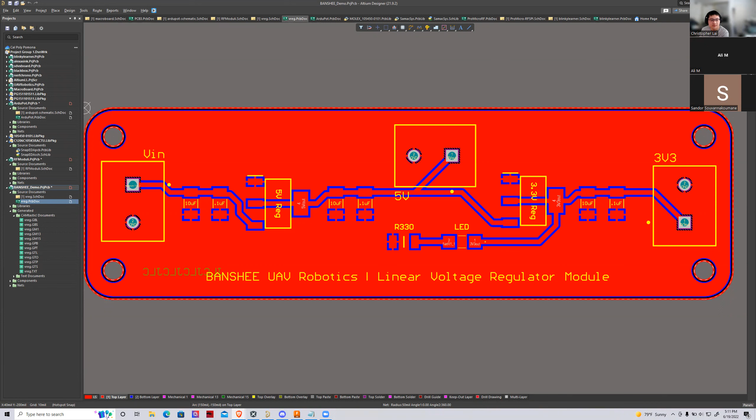Okay, let me just pull up my music back again. I need to have music play in the background, or else my headphones turn off. It's kind of some power safety feature. So if no one's talking for a really long time, it just blanks out. Okay, give me a second. Okay, that should be fine.

All right, so in the previous PCB workshop, we designed this little PCB here with mounting holes. And the purpose of these mounting holes, like I said, was to put screws inside. So my personal favorite screw is the M2.5 by 6 millimeter screw, or the M2.5 screw by default. 2.5 stands for 2.5 millimeters in diameter. So this 100 mil hole will approximately fit the 2.5 screw perfectly.

And so since this hole is in the center of it, we can screw it into something and the PCB will just hang from there. So in order to mount something to a 3D object, this is pretty important. So starting from this point, I'm going to go ahead and first teach you how to extract the STL file from this PCB. Now, remember from the PCB, if we press the 3 button, we can actually see the 3D model of what this looks like.

We have terminal blocks here. We have some SMD chips. We have some capacitors. We have some AMS1117s. It's all pretty cool. But did you know that we can actually turn this into an STL? So all we need to do is go to export, and we need to export it as a STEP 3D file. Now I'm going to go ahead and put this inside my Banshee demo project in Altium. And I'm going to go ahead and just export all.

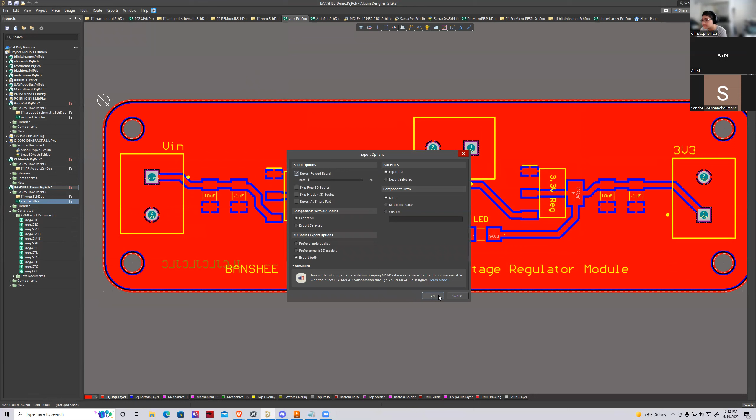Okay, so this is done. Now, I'm going to get back to that in a second, but before that, let me show you exactly what I'm talking about when I say PCB mount. So this is the PCB mount for my Blinky Learner soldering kits, which I have made for the soldering workshop. We can see here that this bottom piece is basically what we're going to look for.

This bottom piece allows us to put a battery inside and screw it shut using a cover, and also has a neat little design in the back with the Hyperloop logo on it, and the top perfectly fits our PCB here. And I'll teach you how to do some projection tricks in order to do that. So this is what we're looking for.

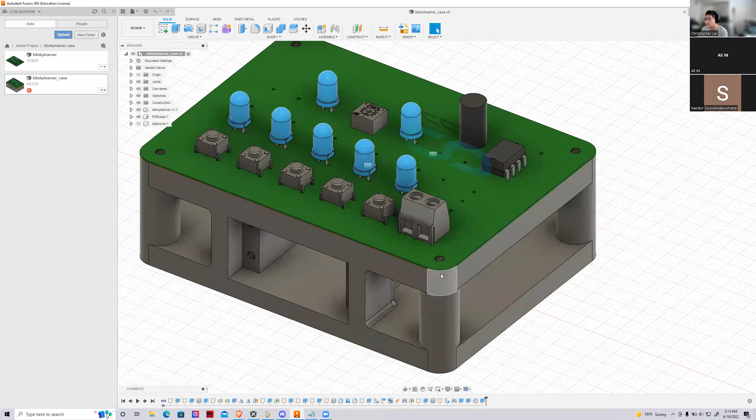This PCB mounts directly into the center of the top mold, and it allows us to screw it in. The 3D printer even prints these screws out. So it allows a really nice tight fit. Okay, so in that case, I'm going to go ahead and create a new file. And I'm going to put this file inside the UAV Banshee Robotics, and I'm going to put it inside case demo.

Okay, new design. So in Fusion 360, you want to first go to the File button, and you want to click New Design, right? And this will give you a new 3D plane in which you can start building it. But before we do that, I have to import something. I have to upload my step file that I imported from Altium.

Now, a step file is basically a 3D modeling file, and it contains instructions for the 3D software on how to reconstruct that diagram. So if I go to documents here, I go to projects, I go to Banshee demo, I go to vreg step. I'm going to drag this inside Fusion, and it's going to start uploading this into the software. So the step file gives it instructions on how to rebuild this file inside of the 3D window. So just give it a little bit of time.

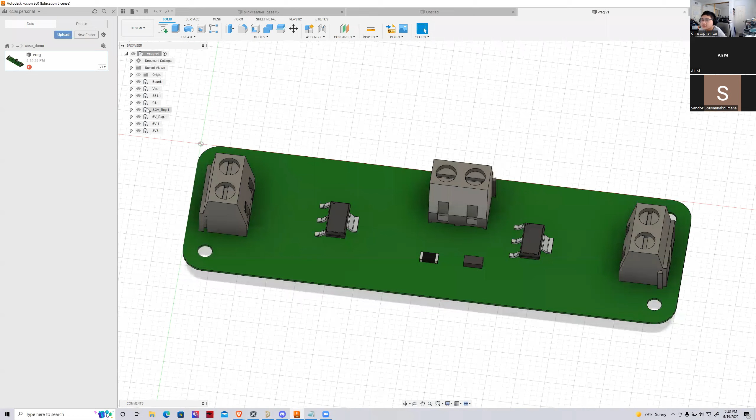Okay, so if we take a look at the VREG model, we can see that this is what our PCB looks like. This is what it looks like without any of the traces. It doesn't actually put the traces on, unfortunately. But in general, it's pretty good. It gives us a bare outline of the size of our PCB. And so this will allow us to design something for it without actually knowing what the size of the PCB is, which is great because that's what projection is.

So we have our PCB, which we're going to design around, right? I'm going to put this into my main body. So this is the case. Okay, so to begin any CAD model, the first step is always your initial sketch. The initial sketch is a 2D shape that goes on either the X, Y, or Z axis. Eventually, in order to make this 3D, you do something called an extrusion. You extrude from this 2D shape into a 3D shape. But everything starts from a 2D sketch, like a square or a triangle or a more complex shape.

All right. So I'm going to quickly import this VREG PCB into my current design right here. I'm going to move it up about 1 inch or so. And I'm going to change the document settings so I can CAD in millimeters, because that's usually better for me.

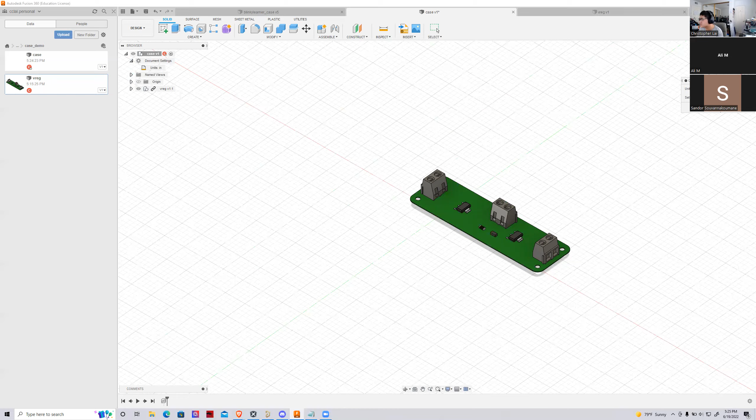Okay, so inside this CAD model, let's first analyze the components that we see here. How do we measure the dimensions of this PCB? We use the inspect tool. If we click the inspect tool and click one side of the PCB and the other side, we can see that this thing is 85 millimeters long, right? And we can also see that it is 25.4 millimeters wide.

At this point, I'm thinking, how do I want to put the battery inside this PCB model? How do I want to structure everything so that this will be a great case that I can mount this PCB on, and have this be a 5-volt supply and a 3.3-volt supply? So I go back to my measurements. I see that my battery is going to be these dimensions. 57.15 can be longwise. 26.5 cannot be this wide because it's going to extrude out from this area. And 19 millimeters can.

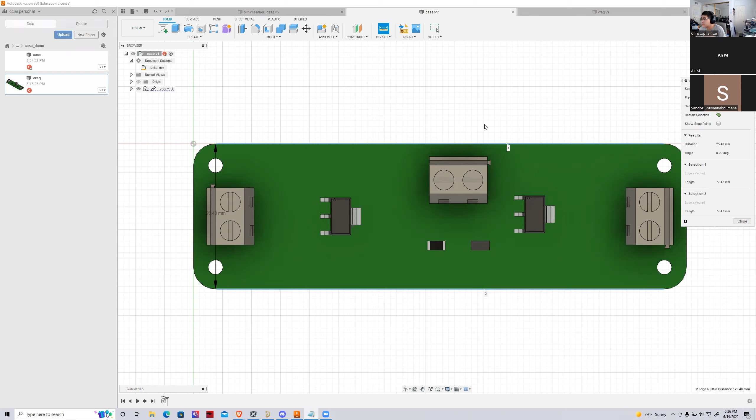So I'm going to put the battery on its side underneath it. And this brings up a good point that I can't directly show you right now: whenever you're CADing, you always have to have a picture in mind of what your CAD is going to look like and how it's going to function, right? So what I want to do is build a case for it.

So I'm going to go ahead and use the outline of this board as my initial sketch. Whenever we're doing anything CAD related, the first step is always to start with a sketch, always to start with a 2D image, okay? So I'm going to create a sketch, and I'm going to create it on the X-axis right here. I clicked on the X-axis, right?

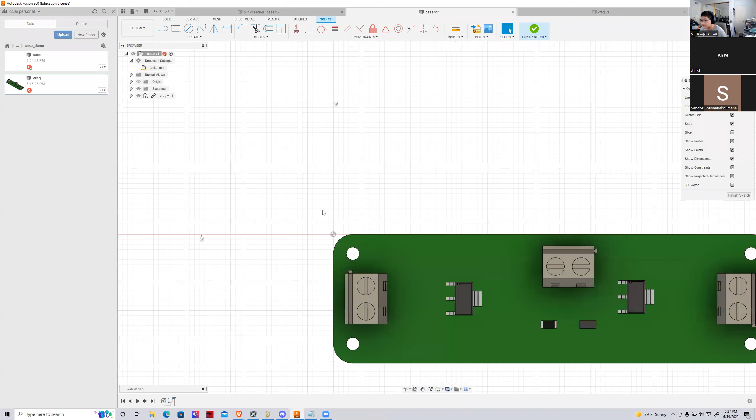If we see the cube up here, X-axis is like over there, Y-axis is like over there, and then Z-axis is like from bottom to top. So I'm currently CADing on the XY axis right here. And I want to use the outline of this PCB in order to start creating my own thing.

So I'm going to go ahead and press the P button. P is something called project geometry. It's very powerful. As electrical engineers, we don't normally CAD from scratch. If you want to CAD from reference, you want to use project geometry a lot. What this does is it allows you to take whatever the outline of this shape is and bring it all the way down here, right?

So I projected the geometry from this PCB down to my shape here. And this gives me the freedom to do whatever I want now, because what I have here is a rounded rectangle of whatever I drew in Altium, but now it is in Fusion 360. So that is project geometry.

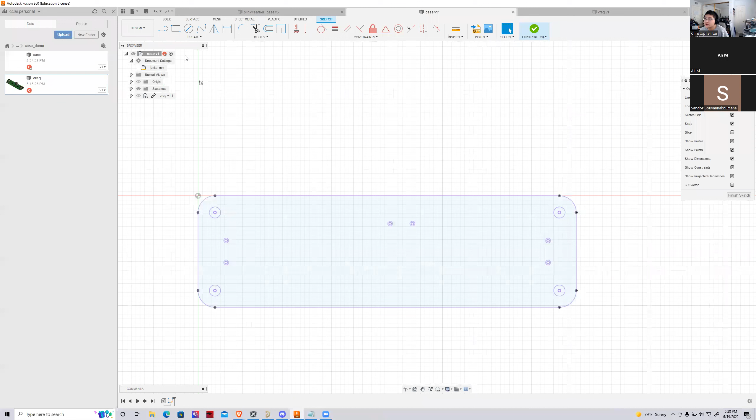Now, in case you want to draw your own thing, which I know is probably what you're going to ask me, you can use the Create tab to make rectangles, circles, whatever you want. You can make rectangles right here and manually edit the size of these rectangles to what you prefer. But I'm not going to do that here because I already have my rounded rectangle.

So everything in CAD starts from a 2D plane, a 2D sketch, a 2D shape. If I press home and see an isometric view of my current design, it literally just looks like a rectangle, right? And this is going to be my base for the mount. This is really important, all right? So if I press finish sketch, I'm left with this rectangular shape here.

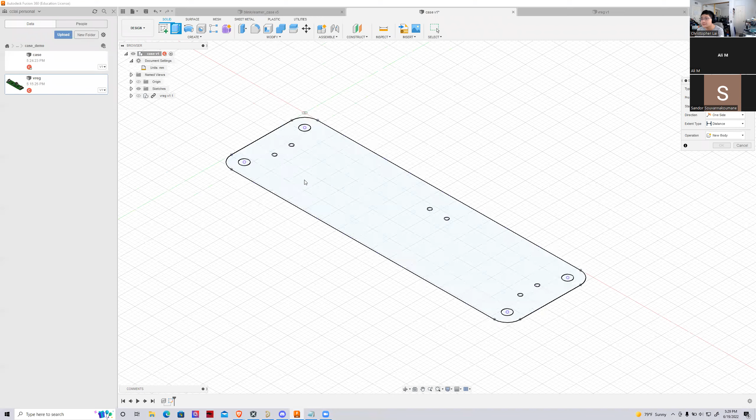In order to turn this from a 2D model to a 3D model, my next step is to use this function called extrude. Extrude will take my 2D model. I'm going to select everything in my 2D model, and I am going to bring this downwards actually, and I'm going to tell you why later.

I am going to bring this downwards, and I want to fit a battery inside of this, and I remember that my height is around 26 millimeters. So I'm going to bring this down to 30 millimeters and press OK. And now suddenly we have a 3D shape. This is going to be known as a body or an object, right?

And this 3D shape came from the fact that I made a projection of the PCB onto a 2D sketch in the XY plane. Then I finished the sketch and extruded it 30 millimeters downwards to become this shape right here.

Extrude? The extrusion button is in the create menu, and it's just this icon right here. So you press this extrude button. When you press it, you have to select the sketch. So if you don't have a sketch first, you won't be able to select this option.

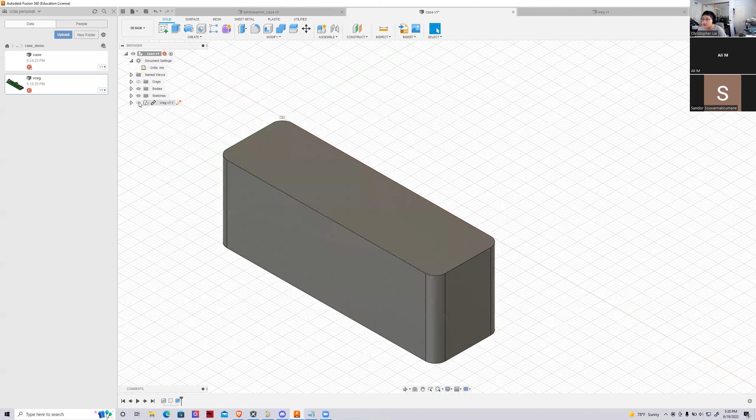Okay, so if I show this regulator board again, I can see that at the top here, this directly matches up with my bottom figure. I can drag this cube around the top right corner to look around this diagram. So if I want to mount this PCB to the ice cream sandwich cube that I just created, I need to drill some holes, right?

And so I'm going to go ahead and start with holes because I think that's a good segue into the batteries and everything like that. Okay, so let's say I want to drill some holes into my 3D model, right? Here's the thing about holes. Holes are great, but also you got to mind your tolerances.

If you're making a through hole, there's two types of holes mainly, right? One type is one you got to screw into, and the second one is where you got to put it all the way through, so like a very loose hole. If I wanted to put an eraser through this hole right here in the design, I can put it right through. It's a very big tolerance, right? That means I can put it through and it's gonna fall down.

A very tight tolerance would be, for example, this screw right here on my macro board. I can't pull this screw out. It's meant to hold the top piece and the bottom piece together. If I actually unscrew this, you'll see that this macro board is broken down into two pieces. This top piece has a loose tolerance. The bottom piece has a tight tolerance. That way I can screw the top screw into the bottom piece while clamping the middle part down. Does that make sense?

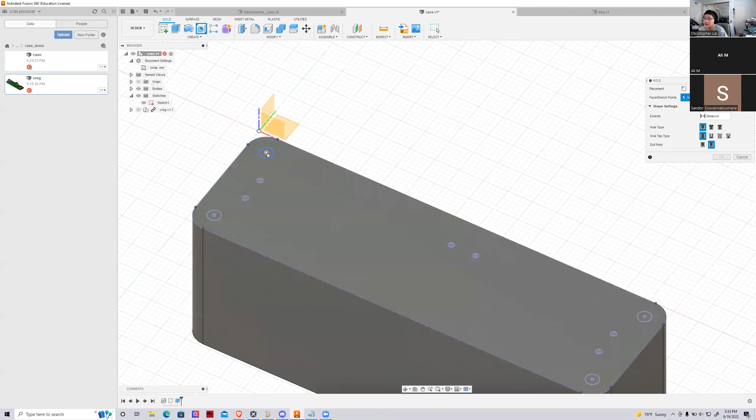However, I want to make the holes on my actual 3D model really tight because I want to screw the PCB on. So to make the holes really tight, I select the hole option, and then I select these four corners. Because I've already projected the geometry onto this figure, it's really easy to use this as a reference to connect with the PCB that I designed. Now we have this menu. Whenever we're making a hole in Fusion 360, it brings up a hole wizard for us.

In this hole wizard, we need to determine what kind of hole we're building. Since I want a really tight tolerance hole, I'm going to make this a threaded hole so I can screw a screw inside of it. So I'm going to select the tapped option, which will give me the indications like the twirly bits inside the 3D model. I'm also going to make this a flat and that's pretty much it.

Again, you got to know what kind of screw you're drilling into this. You need good knowledge of screws, and I can link a video later. I actually held a workshop with Hyperloop on identifying screws and how to use screws in designs that would be really useful. In this case, I'm going to use an M2.5 by 6 millimeter screw. So I'm going to choose the ANSI metric M profile and 2.5 millimeters. In general, there's only two types of screws you'll ever use, imperial or metric. Metric is better here because I've already designed the PCB for it.

I'm going to choose M0.35 because it actually gives a bigger tolerance. This number down here is the hole width: 2.0676 millimeters compared to 2.171 millimeters. This is a huge difference because this is going to be printed in PLA. When PLA shrinks, it's going to be really hard to drill a hole through, which is why making it a little wider will be a lot better in the long run.

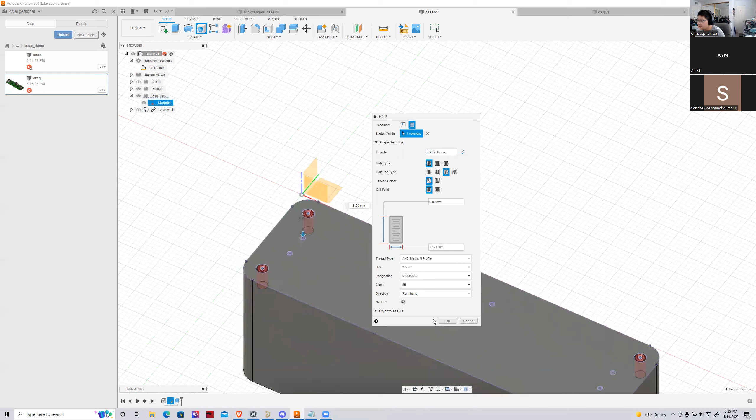And I'm going to press OK. Now I can check this. My PCB has a thickness of how much? It has a thickness of 0.411 millimeters. So in fact, 5 millimeters is being a bit generous. I think it should be actually about 6 millimeters. I'm going to go change that real quick.

So what I'm thinking right now is if I'm going to drill a screw into this design, will it bottom out? Will it hit the bottom before I've actually drilled the entire thing in, right? In this case, if it's an M2.5 by 6 millimeter screw, then it needs to have a 6 millimeter depth. Okay.

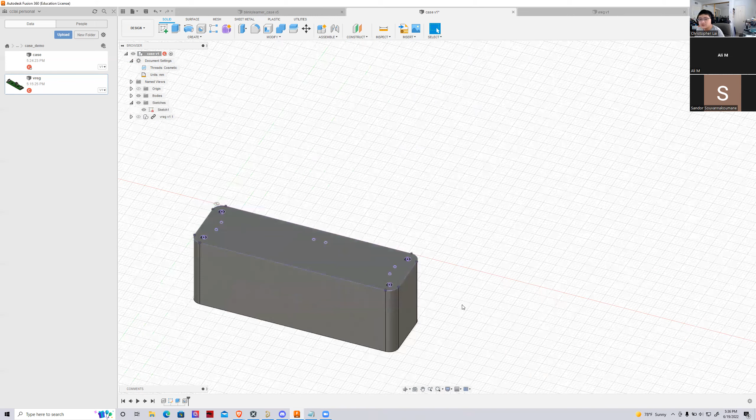All right. Now we've drilled the holes in, which means that we can mount the PCB directly into this top block here, right? If I move this piece downwards into this design, you can see that the holes directly match up with the PCB here, right? And I can go ahead and put a screw straight into this design.

What would be the problem if there's extra space before the screw bottoms out? Your screw is going to stick out of the PCB. That's the problem. It looks ugly. You can kind of force it into it, but in general, like if your screws are flat. I meant the other way. What if you made it 7 millimeters depth? Oh, that's fine. It doesn't really make a difference.

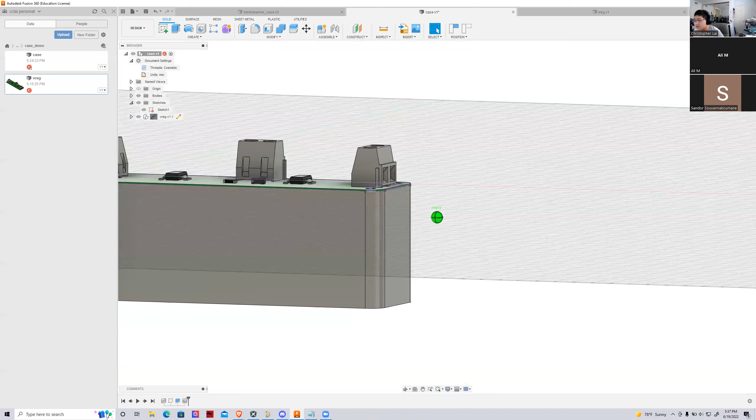It does make a difference if you have something below it, right? Let's say you have a battery below it and the screw goes straight into the battery cage, because I'm going to have a battery cage right below it, right? I haven't designed the place I'm going to put the battery yet; it's going to be somewhere down here. But in general, what I just described to you was just how to correctly tolerance your screws.

In that if it's a 6 millimeter screw, generally you want 6 millimeters, right? It's not going to go over. So knowing what you're going to use to build your design is really important beforehand. So let's say for the PCB, I need to know my bill of materials. That's kind of like the same analogy.

And the bottom of the PCB, is it flat or there's pins sticking out? Good question. There will be pins sticking out. So that was my next point. To compensate for the terminal blocks being there. If you notice, the terminal blocks actually have stuff sticking out on the bottom of them. You can either cut them off or you can just leave them there and compensate for it in the 3D model.

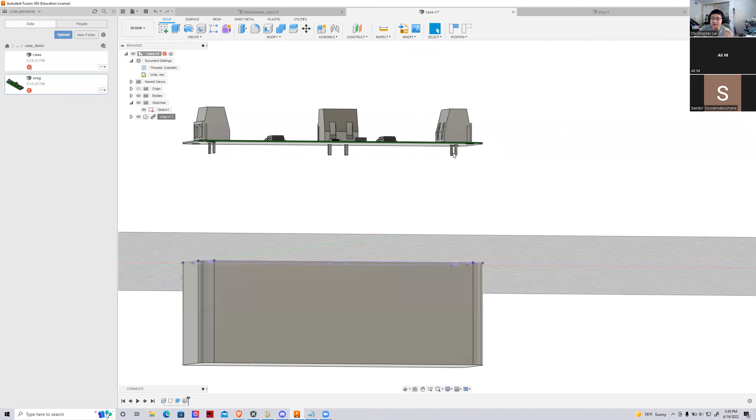So in the 3D model itself, I'm actually going to create a little bit of a divot in the bottom to allow for this little tip. So I'm going to go ahead and measure this. And this little area is actually about 3 millimeters. So I need to make a 3 millimeter divot on the bottom of this PCB design to compensate for the terminal blocks being there. So I will go ahead and create a new sketch.

Revert position. Okay, so I'm going to hide this sketch for now, just for peace of mind. I know in general that the terminal blocks are around here, here, and here. Now my dilemma is, as a 3D modeler, I want to optimize a couple of things. One of the main things is how fast it takes to print this design, right? If I have this design printed faster, that would be way better for me. And how can I make this print faster?

By having less material. So I'm actually going to start cutting out some material from this top face. And I can do that by first using the 4 corners as a reference. Now, there are many ways to do this, right? I'm just showing you my way of doing it. So I'm going to go ahead and use these projection points, actually.

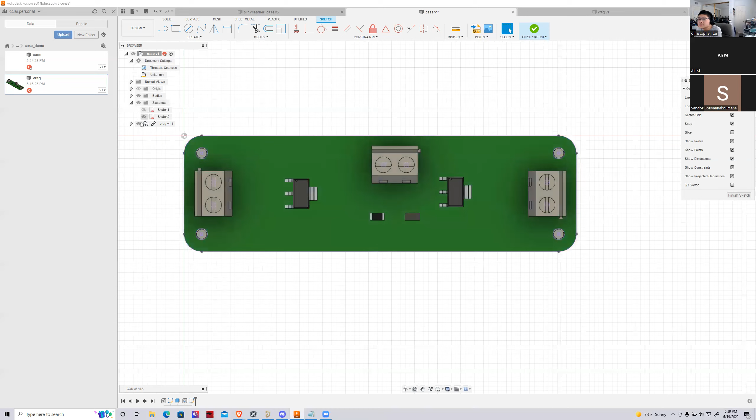So I need to project it from that sketch to this sketch. I'm going to go ahead and project this again. And now I have my own projection of this sketch here, and I can use these points as a reference. So I can then create a rectangle based on this, and I can see exactly where these little terminal block things will stick out, right?

I'm going to go ahead and just cut it all the way down because I don't really feel like printing all this middle area. I can save space if I just make this a round border and have this middle piece go all the way down. So in that case, I'm going to create an offset by making some circles here.

Wait, how did you do that from where you cut out the middle? So I drew a rectangle connecting these 4 holes together, and that created a little section in the middle of this PCB design. Got it. And then I'm going to create these circles so that I can avoid the holes. I can create some offset for the holes themselves, because when I'm drilling them in, they kind of need some support as well. So then that creates this little middle figure, which I can highlight.

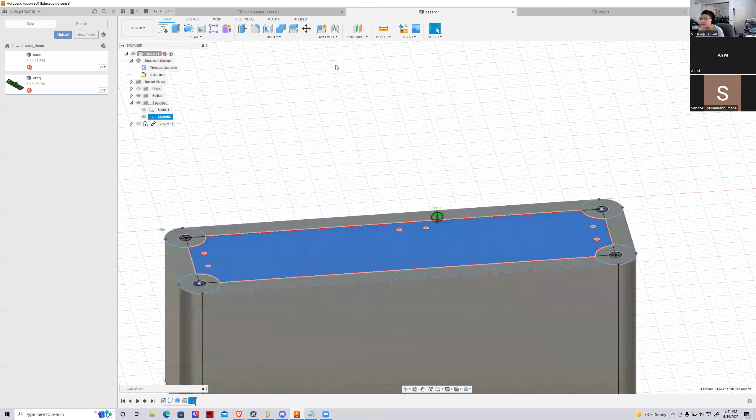And I'm actually going to finish the sketch, and I'm going to extrude this part down, including these little terminal block holes. And Ali, exactly what you said, I'm compensating for the little pins on the terminal block.

Oh, frick. The pains of CADing. All right. Usually you want it to show the top. There you go.

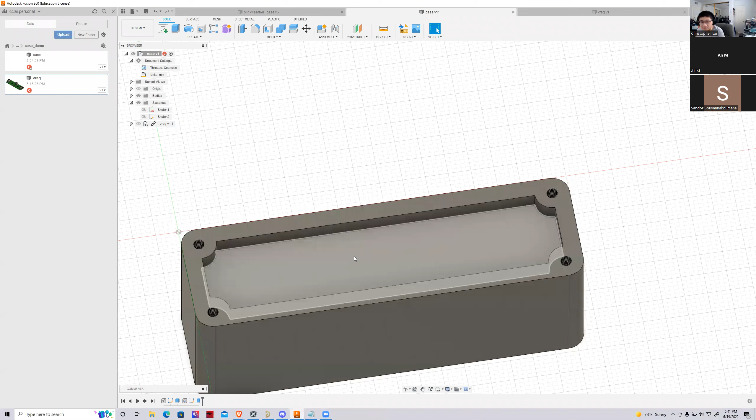Okay, so now I measured the terminal block holes as 3 millimeters, but in order to give this a little bit more room, I'm actually going to put it as 4 millimeters, just as a tolerance. Now, when I do this, I have to keep in mind a few things. Is there anything below this little figure that's going to interfere with my extrusion? And because there's not, this is fine to do, right?

I just have to remember, if I'm making the battery carriage below this, I can't make it 4 millimeters below the top, or else it's going to ram into this figure and I'm going to have issues, right? So basically what I've just done here is I've given the voltage regulator PCB room to fit into my 3D model itself, right?

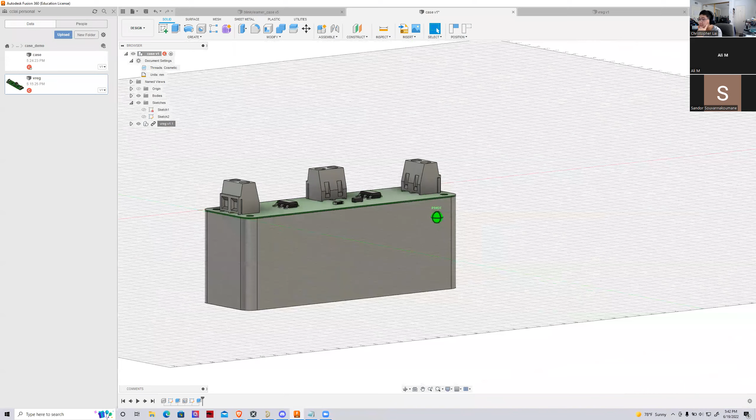If I move this all the way down, and you can press Control 5, I think, to have an X-ray view of what's going on inside. This pin will actually not touch the bottom, and the screw will also be supported by the surrounding area, which is good because now we basically can section off this top area as complete.

We have a way to mount the PCB onto the 3D model that we just CADed up. We also have some room to screw it in, right? And we can avoid the terminal block pins hitting the bottom. Because although you can cut them off, that's generally not advised, for terminal blocks at least. For resistors, you can, because terminal block pins are thick.

So if you just check all the way around the X-ray view, you can see that everything is nicely accounted for, and there's no spacing conflicts. Okay, I'm gonna go back to the previous view.

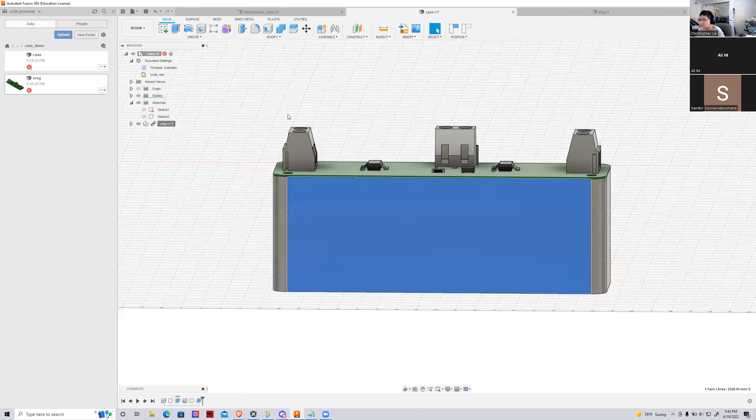Now that our PCB is complete, we have to focus on our battery, right? Because our battery is going to be stored somewhere in the middle of all this stuff. I'm going to put the battery smack dab in the middle in this front face here. So I'm going to make sure there's enough room for the battery. I'm going to inspect this element from the top to the bottom. It says 30, right? And I know it's 30 because I made it 30.

And if we're going to be placing our battery in this orientation into the middle of this diagram, we have to be careful of, let's say, this long side is going to be 26.5 millimeters, right? And we have to remember that we have a screw hole going down 6 millimeters into the top of this design. So in order for it not to be affected, we have to internally diagram our module out. So if we have 6 millimeters from the top, that's going to be our screw.

So if we're looking at this from the side, we have 6 millimeters at the top for the screw, and then I want to make a wall of 2.5 millimeters separating that from the battery. The battery is going to be 26.5 millimeters. And then we're going to have a floor of 2.5 millimeters. So from top to bottom, this is going to be our floor plan, right?

And then in total, this is going to be, can't quick maths. 6 plus 5, 11, 37.5. Yeah, 37.5 millimeters. So in this case, this is too small. Now this is a good technique whenever you're CADing anything, to floor plan your way through what you're going to be making, so that you don't have to guess. This is very practical CAD, because you're going to be making this in real life.

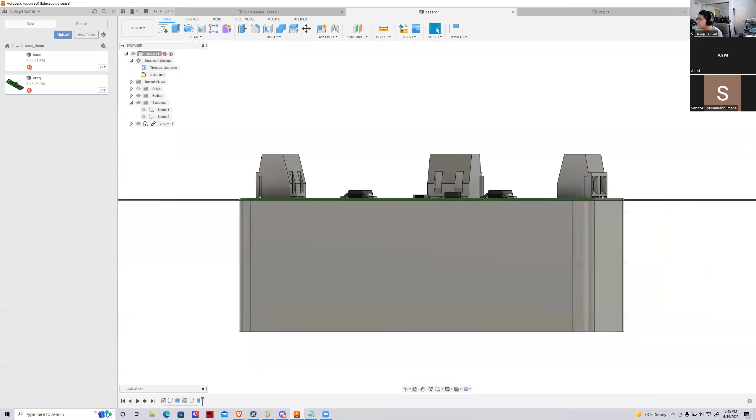One of my friends is in a CAD class right now, and she's a graphic designer, and they had to make sculptures. She has to make household objects using CAD, and she doesn't care about the dimensions of it. It just has to look nice, and that triggered me, because if it doesn't have the correct dimensions, how are you going to make it in real life? Everything has to be proportional to each other. So practical CADing is really important, so that you understand where things are going in your design.

Okay, I'm going to go ahead and reference this extrusion. I click the little rectangle in the bottom timeline here, because I need to modify this. This is going to be negative 37.5. Now I'm going to make a sketch in the front area, and I'm literally going to map this diagram out.

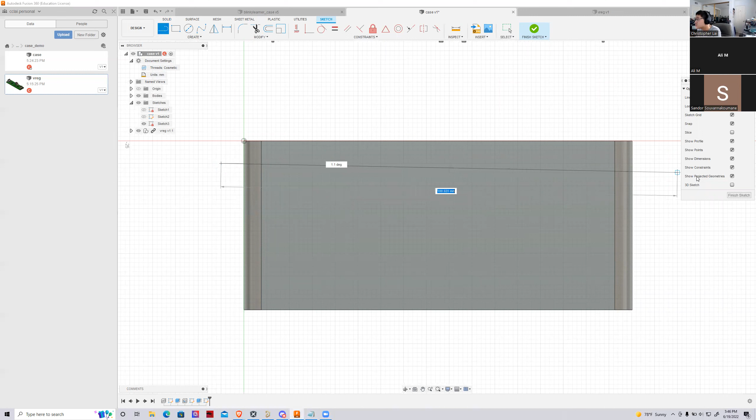So I'm going to have 6 millimeters for the screw. I make a line stretching all the way across, and I dimension it using select dimension. That's how I space things apart from the bottom to the top. So 6 millimeters, this is going to be my screw. I know that if I press Control 5, there's going to be a screw right here going down to 6 millimeters. This gives me an area that tells me I can't design there. I can't design a battery cage there.

My second line is going to be my wall. So I make another line. These lines do not have to be correctly dimensioned; this is just a reference for me to understand. So 2.5 millimeters, that's my wall. And then down here is my battery, 26.5 millimeters. And the distance between the last line and the bottom should be 2.5 millimeters, right?

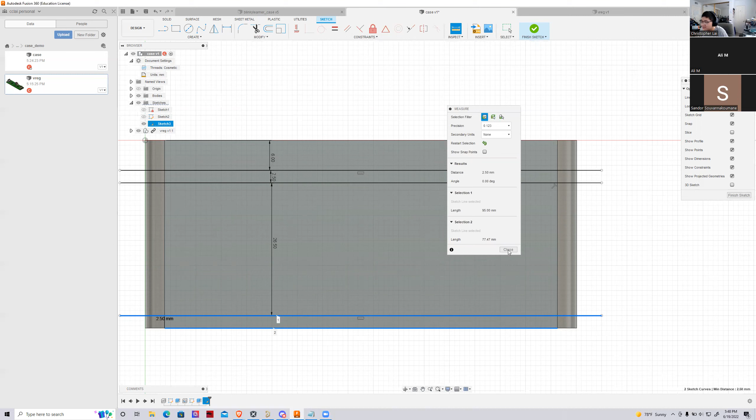And I have verified that what I had in my head is right, my math is right. You'll find out soon that CADing actually has a lot of math to it, a lot of basic addition, subtraction, multiplication, divide by 2, because now we have to find a way to center the battery. We have to basically carve out a hole in the middle of this design to place this battery.

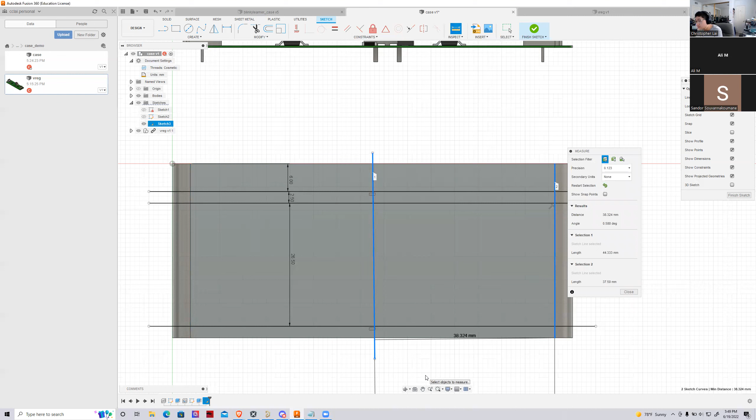So next I'm going to find the center of this rectangle. I say inspect, draw 2 lines, and it tells me that's 77.47. 77.47 divided by 2 is 38.74. So I draw a line in the middle here. Usually Fusion 360 will already tell you the center, but I just want to verify. The distance between this line and this line is 38.324, which is not correct. So I'm going to actually move this.

Oh, you see this? This tells me that it's not a straight line. So because it's not a straight line, I can't have this in the middle here. Okay, usually in this case, if you see the triangle there, that means it's a midpoint. That means Fusion 360 has already found the midpoint for you. In this case, I can just draw all the way to the bottom and verify that it is the midpoint of this rectangle here. So 38.735 is my correct answer.

Great. So what I'm saying is that the battery cage has to go somewhere in these 2 areas here. It has to be centered around this area, right? So 26.5 is the perfect wall height for it. But then I need to make sure that the horizontal area is 57.15 millimeters.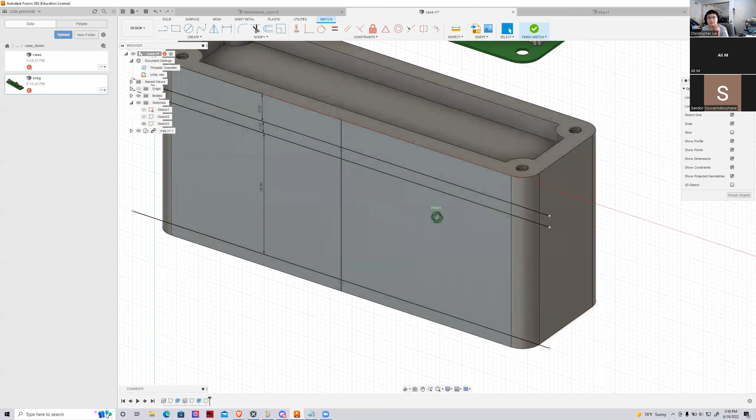Okay. So now I need to make a... Question: why don't you, instead of using the 26.5 side going up, use the 19 millimeter side? So it would be laying down. Right. I think I talked about this before, but if I make the 19.5 millimeter side on this end, then 26.5 will have to be across, right? But if we go ahead and inspect this area here, we find out that this length is 25.4, which is shorter than 26.5. Got it.

So if you want to do that, you can, but you've got to remember to extend the size a little bit. It's just a design choice. So depending on what you want to do, you can do that. That's what I'm saying. But in the context of what I'm doing here, it's better if I just make it like this in the center.

Okay, so I'm going to create 2 more lines. And remember that I'm going to make the side battery wall around 57.15. So half of 57.15 is 28.575. So I need to make a straight line here and dimension this to be 28.575. Okay, so the end of the battery carriage is going to be over there.

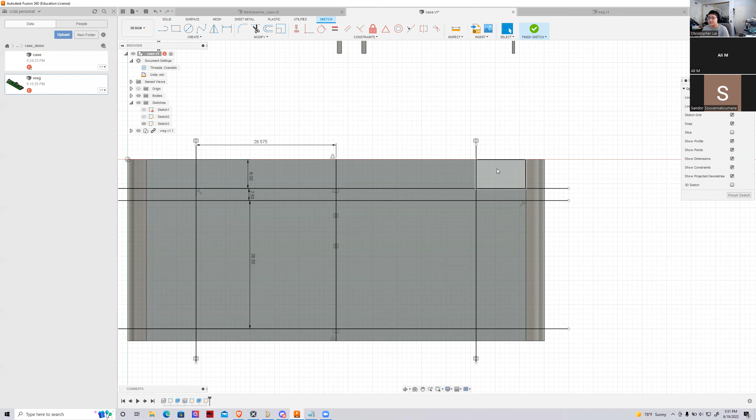Now I'm going to do a quick little trick called a mirror, so I don't have to create another line on the other side of this. And to mirror, I just select the object, the line in which I want to mirror across, and just click OK, and it creates a new line that's directly mirrored from the left. So just like a mirror flipped. The mirror tool is very useful for this.

Okay, so now I understand that these 2 compartments will store my battery for me. And that's basically what I want to get out of this. So I'm going to finish my sketch, and then I'm going to extrude this column, and the inside is going to be 19 millimeters. So I'm going to extrude this all the way inside. I'm actually going to put this as 20 millimeters because I want some way to cover this area when I'm not using it or when I've successfully installed the battery.

So I'm thinking about, if I have this in my hand right now and I'm using it, how am I going to use it? Am I going to have the battery carriage uncovered? Am I going to have it just falling out a little bit? Probably not. So that's why I'm doing this. So I'm going to make it actually 21 deep, just to give it some tolerance.

Now, in general, for my 3D printer, your walls, if they're 2.5 millimeter, they're generally okay. 2.5 millimeter is kind of the standard, I guess, I use for walls. This distance is 4.4 millimeters, which is fine. Okay. Actually, in this case, I would want to make the floor 5 instead of 2.5.

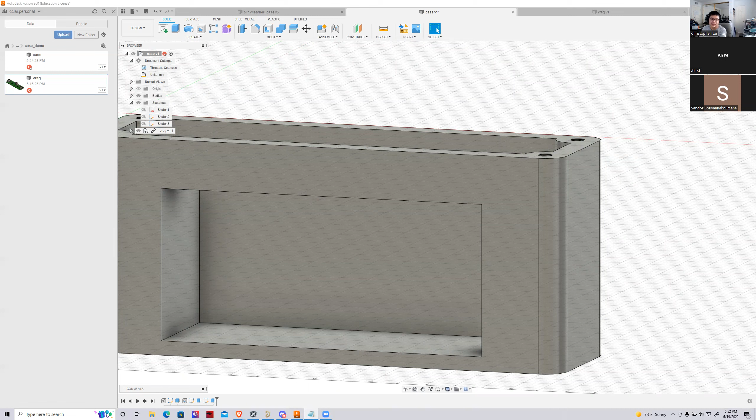So I'm going to add another 2.5 to my sketch here. 5 millimeters gives it a little bit more safety, I guess, a little bit more safe room for me to design with. So in this case, this would actually become 40 millimeters. And I would have to edit my sketch in the back to be 40 millimeters.

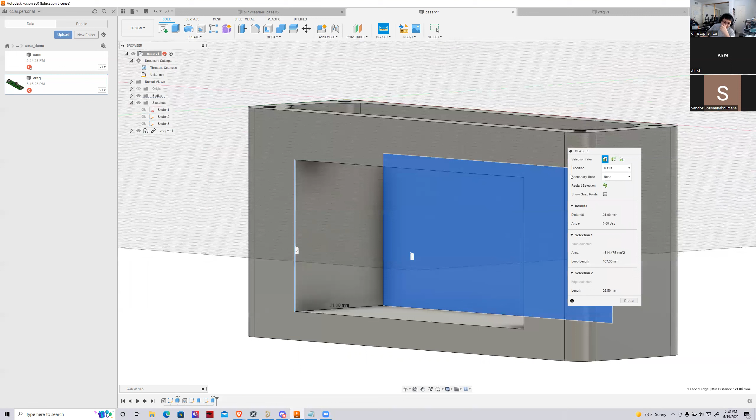Okay, yeah, see, this is a little bit thicker, which gives me a lot more confidence when actually making some covers for this. All right, so this depth is actually going to be 21 millimeters, which is good enough for the battery. So it's going to be able to slot fully in, and it's going to have 2 millimeters of blank space in which I can put a cover on or something. So that's great. Let me go ahead and start designing for that cover.

But before I do that, let me check with the PCB designs to know which side I'm going to put this on. So in this case, the V in is going to be on this side. So if I put the battery into this slot, I can route the wires through the side of this PCB here. Because again, it's 6 millimeters deep, so the wires are going to fit anyways. If I put the battery inside the actual design, the wires can be routed through the 3D model.

And I'm going to try from the top, bottom up. I think I'm actually going to put it on the top. So I'm going to drill a hole straight through this area so that I can put the wires through when I 3D print this. Got it. And so this is just an example of something that you can do electrically, if you understand how you can wire stuff up from your 3D model to the PCB.

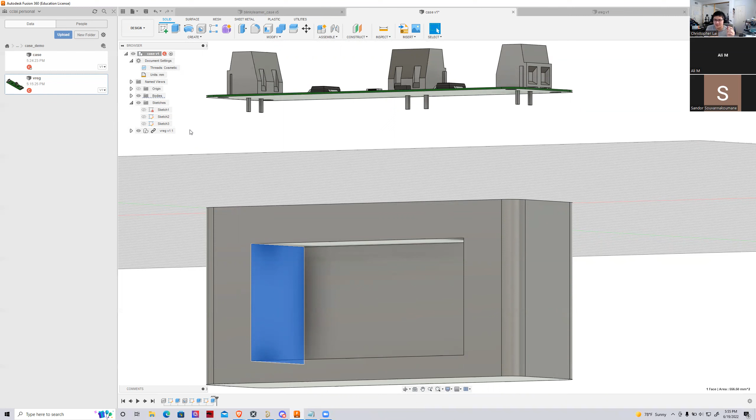There's something you can add in. This thing is connected to the terminal block, which is really dangerous. I can feel like it's shocking myself sometimes when I'm shorting it across. In general, you don't want to do this, but I'm using this for another project right now, so it's just a demonstration. Okay.

So in this case, if you want to CAD something in this divot right here, and you look at it from the right edge, it's going to be hard because you can't really see what you're CADing. So sometimes you like to CAD at an angle, but understand that it's still a flat surface, kind of tilt it in your mind somehow. So this is 21 millimeters deep, which means 21 millimeters divided by 2 is going to be 10.5. If we make a line in the middle here, remember the triangle specifies a midpoint. I can make a line all the way down.

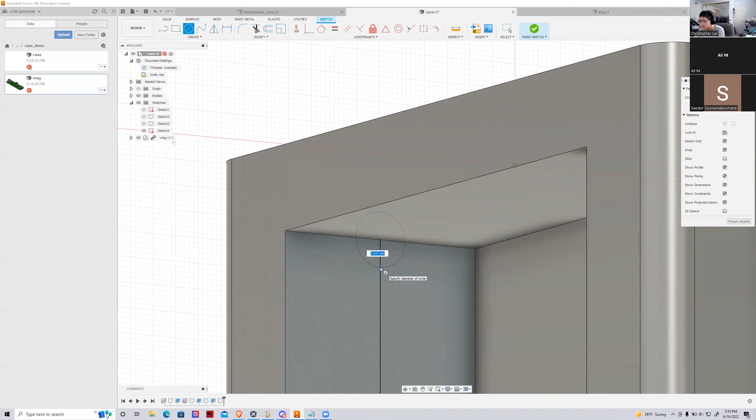And I'm going to make a circle. That's going to be, let's say 5 millimeters, 6 millimeters, 7.5 millimeters. 7.5 sounds nice. Okay. And then I'm going to extrude this all the way through. Okay. Yeah, like that.

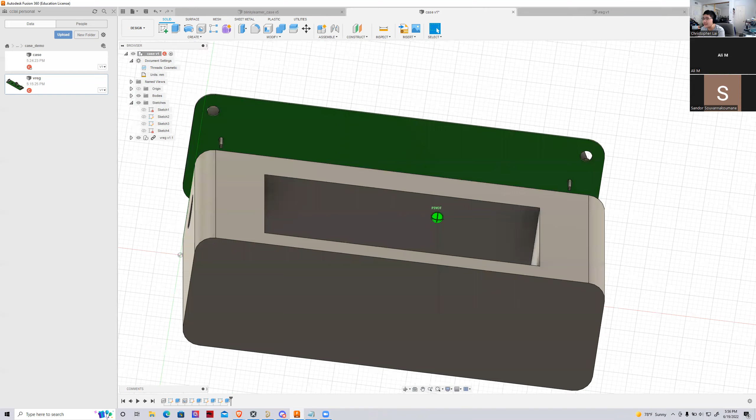All right. At this point, you have to think to yourself, how am I going to print this? If I print this model from the bottom up, then this is going to have a lot of support. You want to minimize the amount of support you have while printing. If I print it on the side, that's going to work. If this side is touching the bottom, and it prints from the bottom up like this, this is going to work. Oh, hold on. Like this. So if I print it this side up, it's going to work without any supports. But this bevel is going to be a little sketchy to do.

So in this case, the optimal thing to do is to print this using the belt printer. At a 45-degree angle, this is actually going to print perfectly without any supports. The 45-degree printer will just keep printing diagonally like this. And then when it reaches this point, it'll connect with the previous junction and allow it to print normally. And it won't need any supports to do so, which is the best part of this.

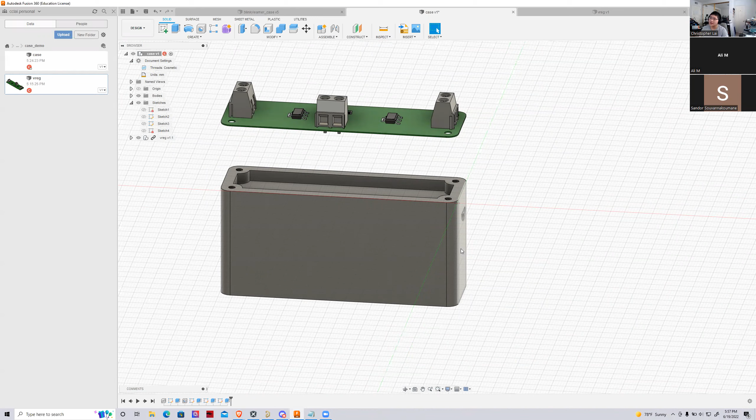It might need some support here, maybe. Let me think. No, not if I print it backwards. If I print it starting from this end, then it'll just follow through and it won't need any supports there. It's kind of hard to explain because a lot of CADing is mental. But basically, at every point of CAD, if you're going to 3D print this, you have to think how you're going to 3D print it. And in this case, because I have so many complex shapes, I can't print it using a normal 3D printer. I've got to use my 45-degree belt printer. Does that kind of make sense?

Okay. So I'm going to put my battery in here and I'm going to wire it through this crescent shape into the PCB on top. And I think the last thing I need to do for this model is to add some sort of battery cover to it. And adding a battery cover is going to be pretty simple in my opinion.

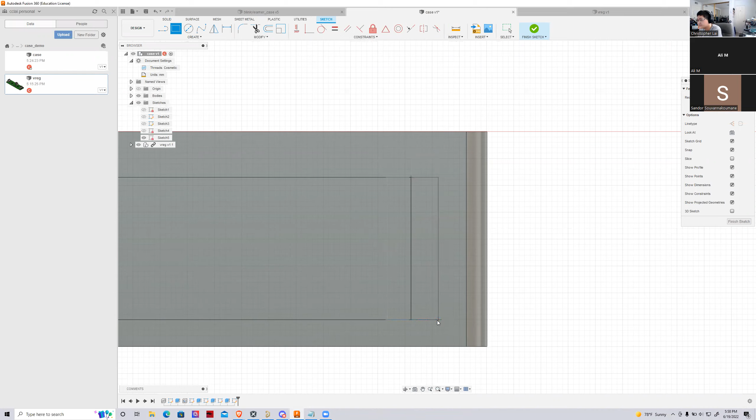I'm going to just create two rectangles from this shape that are going to be, let's say, 5 millimeters deep. And then I'm just going to put a screw hole through it. So I'm going to finish the sketch, and then I'm going to extrude this. Again, remember, it's going to be 2 millimeters deep because that's how much tolerance I gave it.

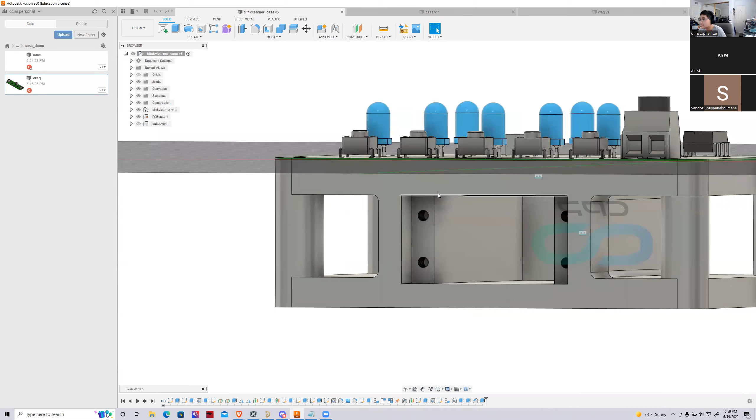And I'm going to basically just CAD an extra piece that will go on top of this, and it'll screw in perfectly, right? It's kind of like in my Blinky Learner case, in which I had this little divot here, in which I had a battery cover so that you could just screw it in like this. But in this case, it would be much wider to compensate for the fact that there's such a large opening for the battery.

So I'm going to go ahead and make the holes by creating a sketch on this plane. The plane I'm CADing in is actually this plane right here, which has the 2 millimeter extrusion down into the PCB. So I think I'm going to use a M2.5 by 6 millimeter screw again, but this time these screw holes are going to be only 4 millimeters deep because I already have compensated for that edge.

Okay, so in order for me to space these screws out correctly, I'm going to use a divide by 3 method. So I'm going to space this evenly within 3 intervals from the top and the bottom. So I'm going to measure the top and bottom, which is 26.5, and I'm going to take 26.5 and divide this by 3. This will give me 8.8 millimeters approximately.

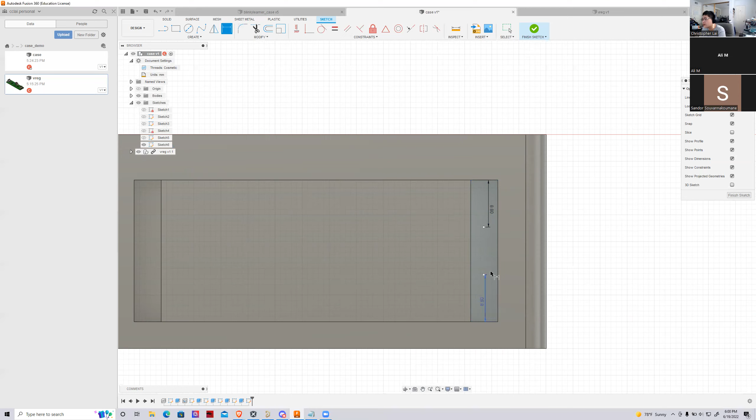So to be precise, I'm going to use a point. And I'm going to draw 2 points on this surface, and I'm going to space them out 8.8 millimeters evenly with each other. Okay, so now I'm going to imagine to myself, okay, I see these holes right here. Is this what I want eventually inside the design?

And this spacing looks a bit too close. Structurally, you want these screws to be spaced out so that when you screw it in, it'll be nicely supported by the interior of your design. So in this case, I'm actually going to go ahead and divide by 4 instead. And this gives me 6.625, which I think will be good. 6.625. Okay, so that spacing looks a little bit better.

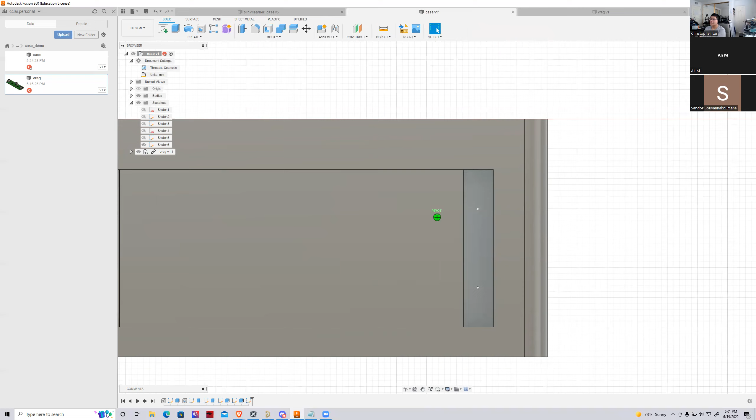So let me go ahead and finish the sketch, and I'm going to extrude it. I'm going to create holes in these 2 locations with the same settings I used to create the holes on the outer edge. These are going to be M2.5 by 6 millimeter screws, so the same settings, but this time they're sideways. Now sideways holes are actually printable by the 3D printer, which is pretty impressive. So these holes will actually print out along with the upper holes as well.

Okay. Can you mirror those 2 holes to the other side? Yes, that was my next step. So you got me there. Good forward thinking. So we learned how to mirror sketches. Now we're going to learn how to mirror objects. And I'm going to introduce you to the planes.

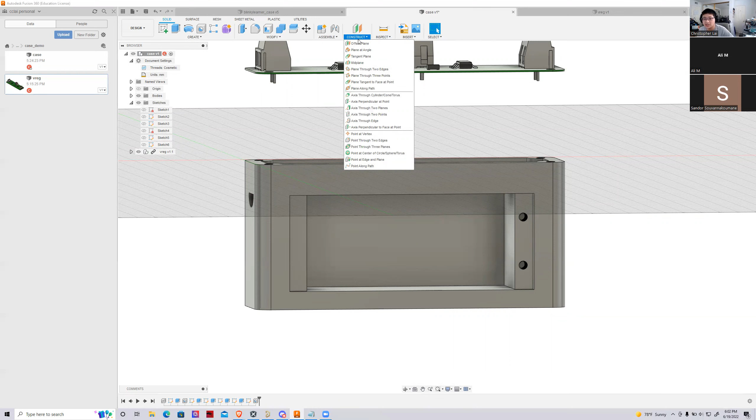So in order to CAD anything in 3D modeling, you need to use what's called planes. And there are a lot of planes like the origin planes. The origin planes are the planes we started out from, the XY, the YZ, and the ZX. But there are also object planes. You can make planes based on the object that you are CADing right now. So for example, I want a midplane, right? I'm going to select the midplane, which can be created by selecting the 2 edges right here.

And it'll make a plane directly in the middle, smack dab in the middle, right? And since these 2 edges are symmetric to each other, all I need to do is use the mirror, right? But this time I'm going to mirror the features of these holes. So in that case, I'm going to mirror this, and then my mirror plane is going to be here.

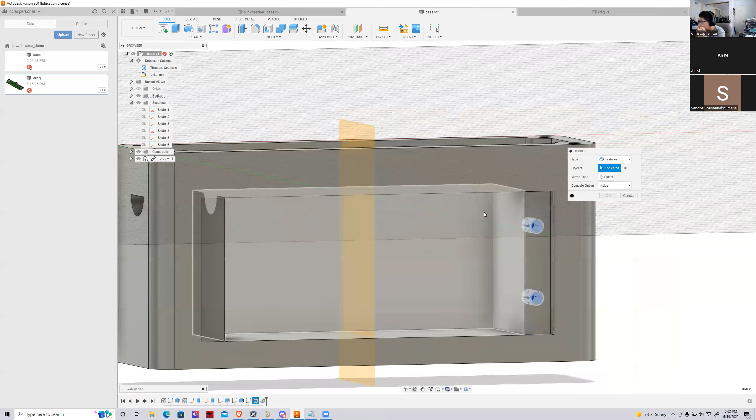Oh, hold on. I need to mirror the right thing. So I'm going to mirror features. Sometimes you have a hard time selecting it. Come on. Oh, there you go. So you select the holes, you select the mirror plane, and it mirrors it to the left side. So now you have your threaded holes on both sides of your design, like that.

Okay, and then you can just select the mirrored plane and press V to make it invisible. So I've only sketched one side, but now it's on the other side. And this is good because both of them are parameterized, which means that if I make a change to this side, it'll also make the change to the other side as well. So if I have to make the hole deeper on one side, it'll make the hole deeper on the other side. Pretty nice.

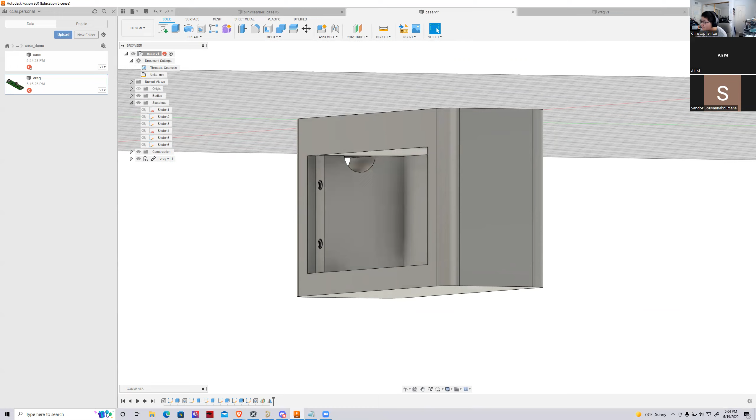Okay, so now I noticed a slight problem that I'd like to fix. This crescent-shaped hole is centered when we look at the battery cage. However, it is not centered when we look here. It's a little bit deformed. So I want to center it on this edge as well, which means it will not be centered on the inner edge, but this gives us a better outlook, because I care about looks too. It looks better if it's centered on the outside.

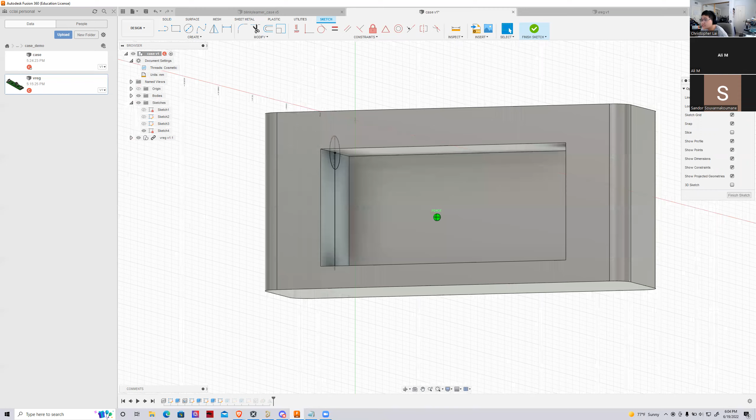In that case, I have to go back to the previous sketch, which is over here. This sketch was the one where we drew the semicircle. So in order to center it on the outskirts as well, I need to find the center between this line and this line, which is 25.40. That divided by 2 is 12.7, which means the center of this hole has to be 12.7 away from an edge.

So I can dimension this: click the dimension button, click on the center of this circle, click on the edge here, and oh, this will overconstrain the sketch. So I need to delete this line. Then I'm going to change this to 12.7, and it moves the entire crescent there. So I don't care how it looks on the inside, but on the outside, now it's centered and it looks nice, right?

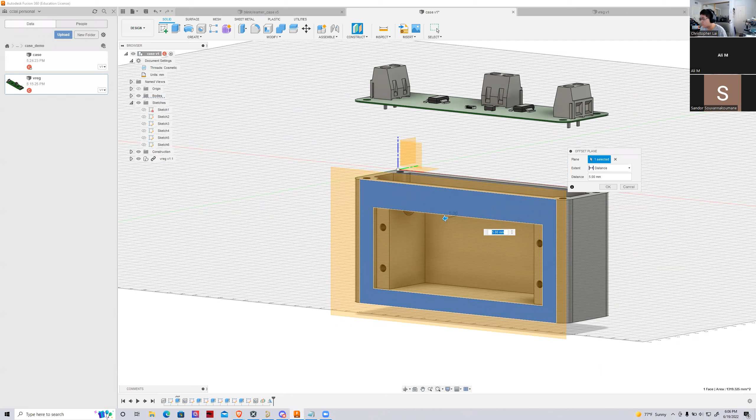That's cool. The last part of this is making the cover for this entire area here. So to do that, I'm going to make a plane, because I want to start a sketch from somewhere. I'm going to make a plane on this front surface and offset it by 3 or 5 millimeters. This is what's called an offset plane. If you want to diagram something, like an extension to one of your 3D models, but from a distance, this is how you do it. So from the side, it's not directly touching the surface.

And I'm going to press OK and start the sketch here. Now, I'm immediately going to project geometry. I'm going to project this outer rectangle here because I'm going to make a cover for it, a small 2 millimeter little rectangle. However, I cannot just extrude this small little rectangle because it will not fit.

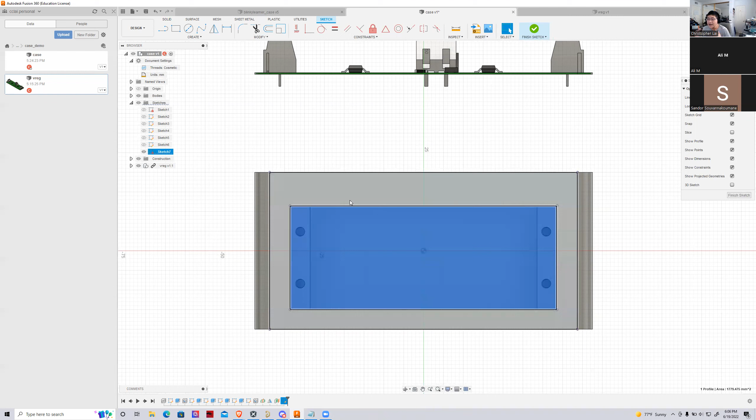Again, tolerances are really important. If I just extrude this and print everything out, this little area will not fit because the outer part will shrink faster than the smaller parts, and we'll get some tolerance errors. So in order to avoid this, I'm going to teach you a new command called offset.

So in the sketch window, you can go ahead and click the offset and click this rectangle here, and it'll actually automatically create a new sketch for you that is going to be offset from your outside model. So again, I'm going to go ahead and make a 0.5 millimeter offset; 0.5 millimeter offset should be good enough for this.

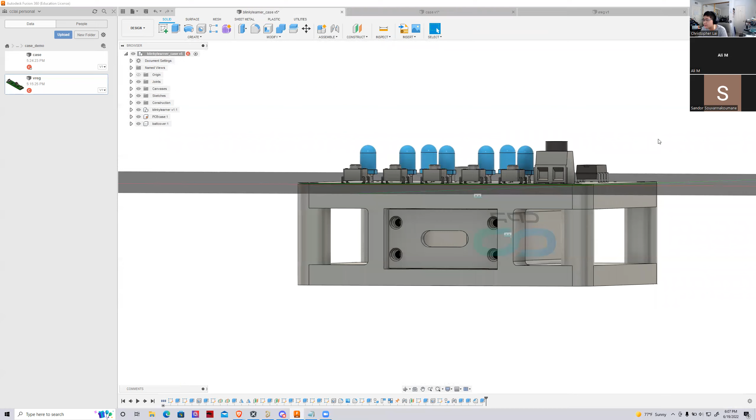So this rectangle is 0.5 millimeters as an offset from the outer diagram. I think actually it's even less, if I remember correctly. So my battery cover is even less from it. Let me see. So having previous designs really helps you. I think it's 5.08. I think that's 0.25. Let me check.

Yeah, so the distance between these two lines here. Oh. It is 0.25 millimeters. 0.254. Okay, 0.254. I'm going to use that instead as an offset instead of 0.5 because this might be too loose.

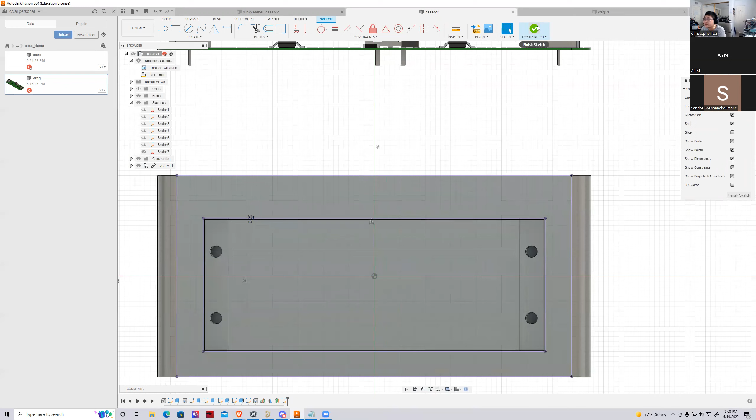And if you get a dimension wrong, it's okay. You can always just print again, right? It's not the end of the world. We are lucky to have enough funding to reprint again and again if we have to.

So 2 millimeters, I'm going to create this as a new body. And when I press OK, this sketch will be completed. All right, so we know this divot is 2 millimeters, right? And if we place this inside, it should be flush with the outer surface. And generally, that's true. There is going to be a small tolerance that will cause it to not be flush, which I think I'll just account for by making this a little bit thinner. I'll make this 1.9 millimeters instead of 2.0.

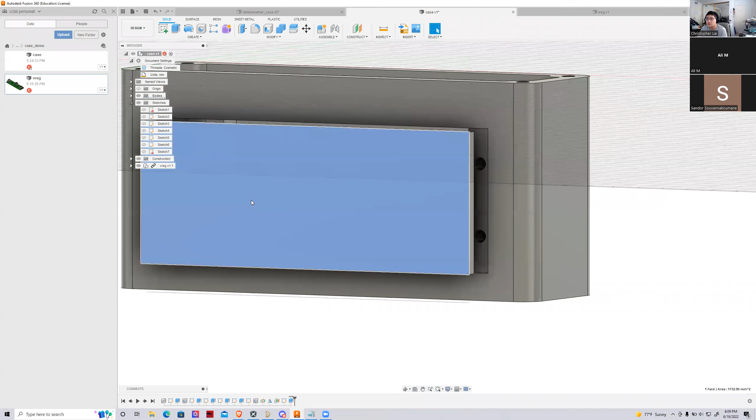There we go. Okay, so now we need to make the holes. And this was what I was talking about. There are two types of holes in the world. One is a through hole, and the other is the tight hole, right? And the tight hole is just like the threaded screw hole. We're going to make a loose hole here. And the loose hole is really important because it will allow us to screw it in. When we're screwing it in, we won't have to screw the screw through this 2 millimeter thick piece, right? We can just screw it through into this hole right here.

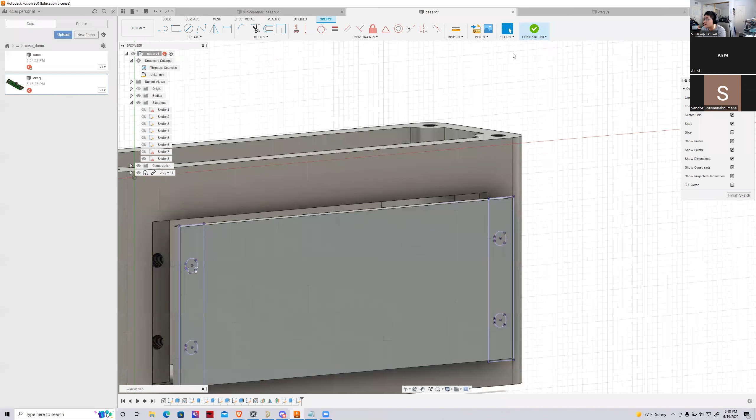Okay. So I'm going to make a sketch on the surface of this battery cover here, right? And I'm going to go ahead and project the geometry of the back holes. So I'm going to do project geometry. I'm going to project this hole, and I'm going to project this hole as well. Press OK. And I can see I have the center of the holes already on the sketch for me. This is great. So all I need to do is finish sketch, and then I'm going to make a hole through here.

Now, this hole is going to be a little bit different, and let me tell you why. So in my box of a lot of stuff here, one of them has a lot of screws. So this is a box of a lot of screws, and I have a lot of these storage crates. I bought a bunch of these M2.5 screws that I'll eventually use. I bought these from, what's that company's name? McMaster-Carr. So these screws have a flat top on it. And the flat top is great because it allows me to screw things in flush with the surface.

I have other M2.5 screws, including this one. Oh, this one's kind of the same thing. Yeah, this one's exactly the same thing. I have bigger screws here. These have a more rounded top. And I have other screws, which we actually have inside of our room here. These are countersunk screws, M2.5 countersunk screws. I don't know if that's clear or not, but the tops have a horizontal cone-shaped divot that goes into

the board itself. So when you're designing, you have to understand what kind of screws you're working with, either countersunk or counterbore. And in this case, I think I'm going to use counterbore screws to screw this together. So I have to account for this in my design. I'm going to get a screw just to make sure I have the correct measurements in here. So counterbore screws look like this. They have the rectangular head shape here.

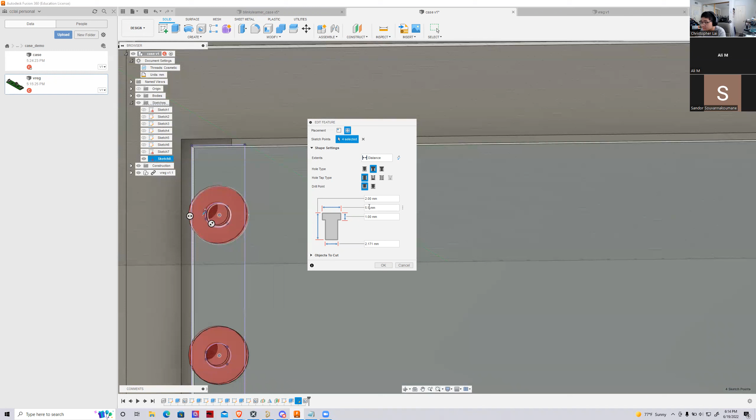5.5. So this hole is like 5.5 wide. All right, so now we have a problem because this hole is going to be a little bit too wide, which is fine. I'm going to make it 5 millimeters. Okay, that's not going to work. How thin can I make it with it still being able to fit in it? 4.80. Yeah, see here is a mistake of not proportioning your holes correctly before you start making them. Okay, that's not gonna fit. We're just gonna say it's 5 millimeters and, yeah, the top of the hole is not gonna fit. Okay, just kidding. Simple hole it is.

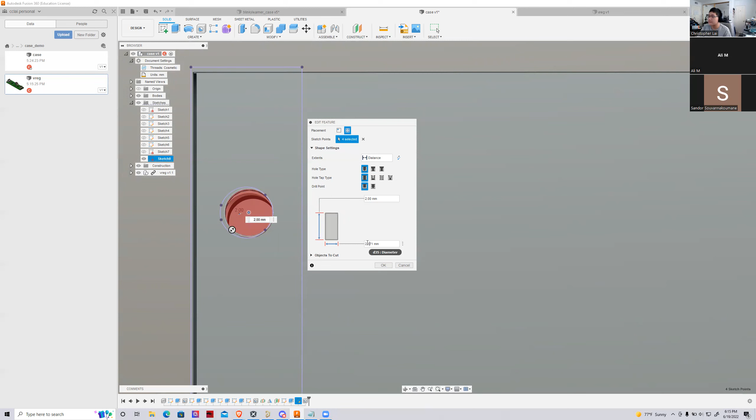The width of the hole is going to be approximately 3.3 millimeters. I'm coming up with 3 millimeters because I'm giving it a little bit of tolerance, and if I can wiggle the screw around inside this hole, then I know it's good enough. So this is a 3 millimeter diameter hole. Now, the screw isn't going to screw into this. It's supposed to loosely fit through this hole, right? And this is evident because the hole on the outside is actually bigger than the hole on the inside, right?

So we don't want to screw two pieces of plastic together. We only want to screw into one piece of plastic. The screw just holds this big piece in with the rest of the board. And I know I didn't make a flush hole because it's not going to fit anyways, but it's okay for this example. All right, now let's go. Actually this is okay.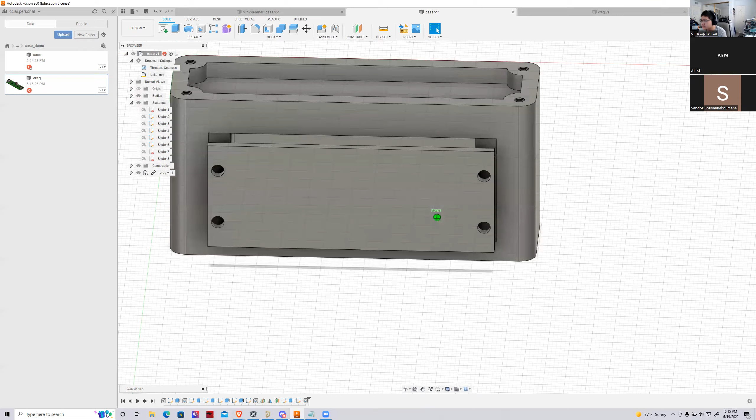Let's say I want to add some more stuff to it. Let's say I want to put Banshee UAV Robotics, right? You can do that by adding text. Now, text actually prints pretty well on PLA for both the Belty and the regular printer. You'll be surprised at how well text prints. And it's really cool because you can personalize whatever you're printing.

So let's say I put in, I like to use the font, where is it? The font I'm looking at is this one, the condensed extra. I'm going to put Banshee UAV Robotics. And then I'm going to change the height down to like 5 millimeters. I'm going to put it aligned centered like that, right? And then I'm going to press OK.

So this is just some personalization things you can do. And then you can go ahead and extrude this. Let's say extruding it -1 millimeters into this surface. And then suddenly you have your very own neat little personalized battery cover that you can screw into this little PCB holder that you've designed as well.

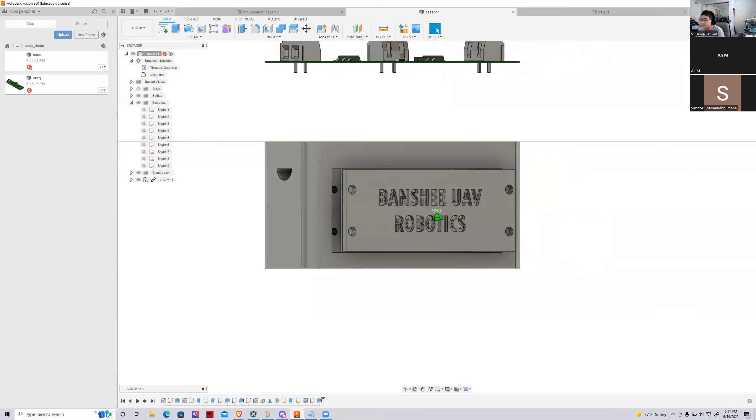Okay. I know the sides look a little bland and I'm tempted to add more things to it, but I'm not going to, just for the sake of printing this out in a timely manner. I'm really tempted to, because I usually just put stuff on the back as well, if I have more time, and this takes a lot of time.

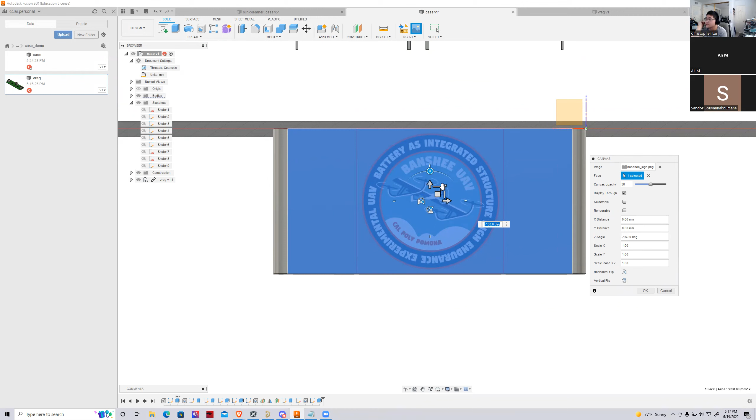I'm just going to give you guys an option here. You can insert a canvas, and let's say I go ahead and insert the Banshee UAV logo. This is upside down, so I'm just going to rotate this here. Okay. Now, if anyone is mad lad enough to get me an SVG file of this image, what you can do is import the SVG file and actually have each of them as divots. You can actually CAD this logo straight into the design.

Personally, I would be tempted to do this, but I don't have the time to. You can insert an SVG file and do this automatically, basically having your logo inside of the actual design, kind of like the Blinky Learner case, where I individually traced every single divot of the CPP Hyperloop image into the actual design.

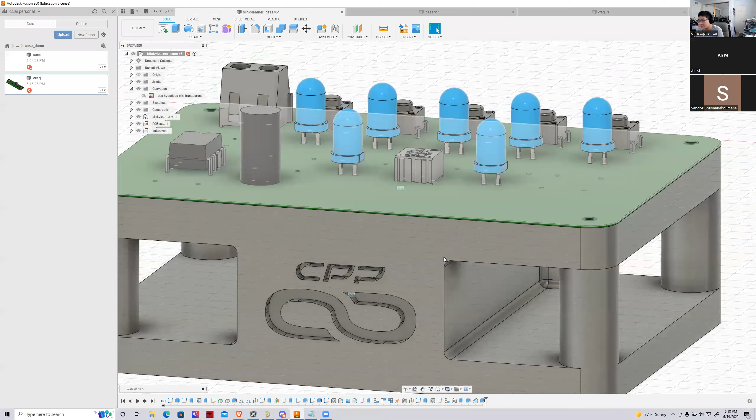So if I just get rid of the picture, you can see that this is actually CADed in. So it prints really nice, and it's a really nice memorabilia. So in case you want to make something designer friendly, that's how you do it. But I don't have the time for that. So we are pretty much done with the design. All that's left to do is to make it look nice. Control 4 will get rid of all the lines so you can see what it looks like on the screen.

But I'm going to tell you guys one more thing before I send this to the STL file for production. I'm going to make sure that all of these are components, so I'm going to teach you how to join these things together. In order to joint this together so it acts like one body and not a separate body, I'm going to first name my bodies. This is going to be my main body. This is going to be my back cover, so my battery cover. Right. And I'm going to right click and select create components from bodies.

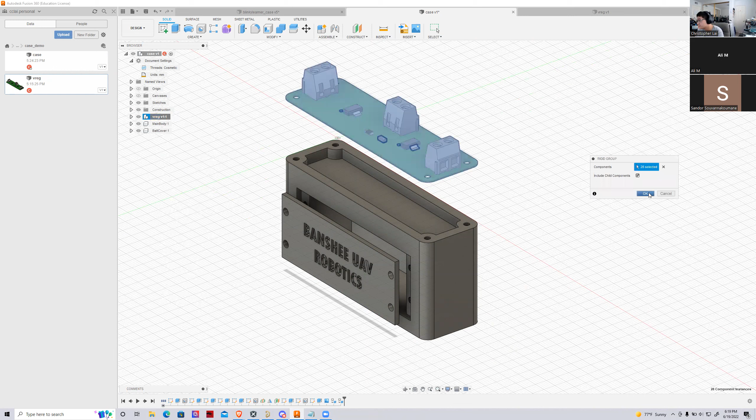So now these are components, and I'm going to make sure that this is a rigid group. What a rigid group is: see how I can move it around, see these little components on here with the terminal blocks and the capacitors and whatnot. If I didn't have rigid group, this would just move all over the place. I would only be able to move the PCB and not everything else on top of it. So that's why I have it as a rigid group.

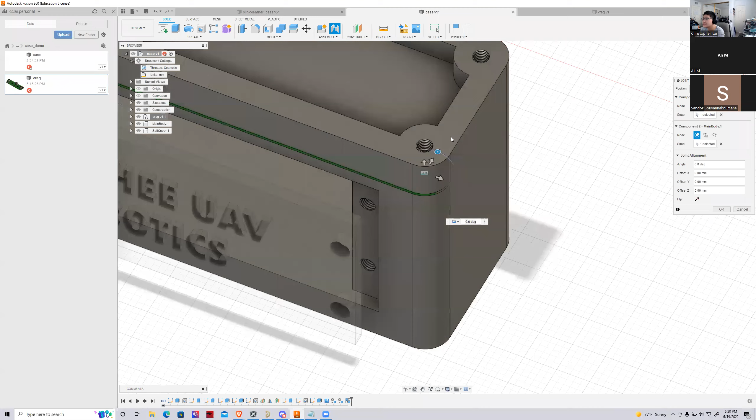Now I'm going to use the joint function to joint this top PCB piece to the bottom PCB piece here. So if I select this and move this to the top. There we go. Press OK. Basically what I just did was I constrained these two pieces together, right? So the main body and the PCB are now one piece together.

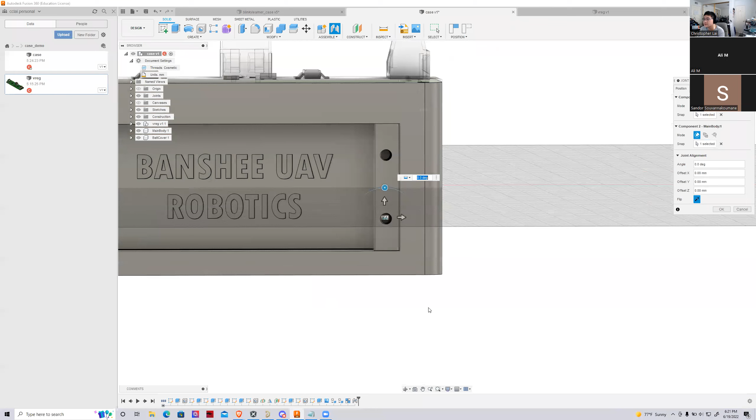Will the cover be printed horizontally flat separated from the main body? Correct. I will be able to print this little piece separate. So I'm going to joint the front piece now into the hole on the front, and I can adjust it if necessary. Theoretically, I do want this to be flush. Okay. All right. So now, this is pretty much it. We have created a PCB mount for our voltage regulator with a battery compartment on the inside and personalized text via the Banshee UAV Robotics symbol in front of the battery cover.

The final step is to turn this into an STL and actually print it on some 3D printers. So I'm going to click on the body, right click it, click export, and export this as an STL file. Actually, I'm going to save as mesh first, because that's how you save it as an STL file. Under mesh, you have the ability to send to a 3D print utility. Unfortunately, the Belty 3D print utility is on my other computer.

So if I want to start this print on Belty, I'm going to have to slice it on my other computer. Slicing is the action of turning the mesh into something the printer can actually recognize, a G-code file. So the printer will take these G-code instructions and move the stepper motors to actually print the diagram you want.

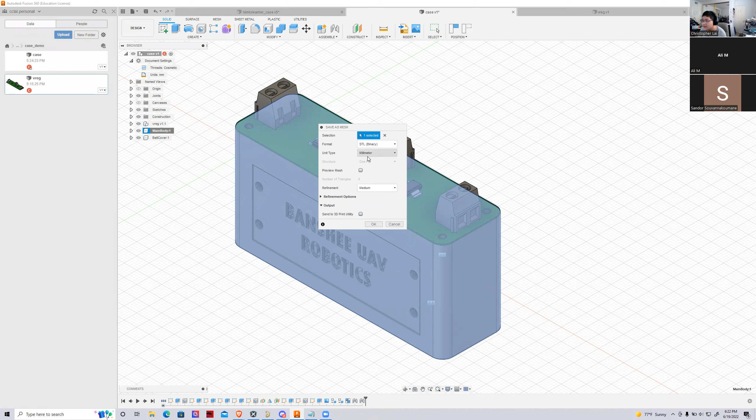So in this case, I'm going to go ahead and just save this as a STL file. I want to make sure I have the unit type as millimeter, and I'm going to click OK. And then here I'm going to go into my Robotics file, and I'm going to save this as a main body. It's going to be VREG.

Okay. Now I'm going to show you what it's actually like to slice it. I'm going to slice the battery cover for you so you guys can see how the printer will interpret this diagram as actual instructions to start printing it out. So I'm going to save as mesh, but this time I'm going to save it as send to its 3D print utility, and my 3D print utility is going to be Cura. So I'm going to press OK.

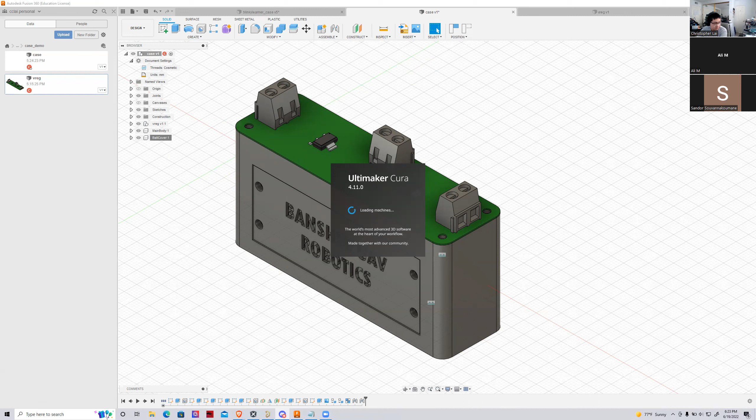Okay. Come on, Cura, open up. I did send to Cura, right? Oh, Cura just opened up.

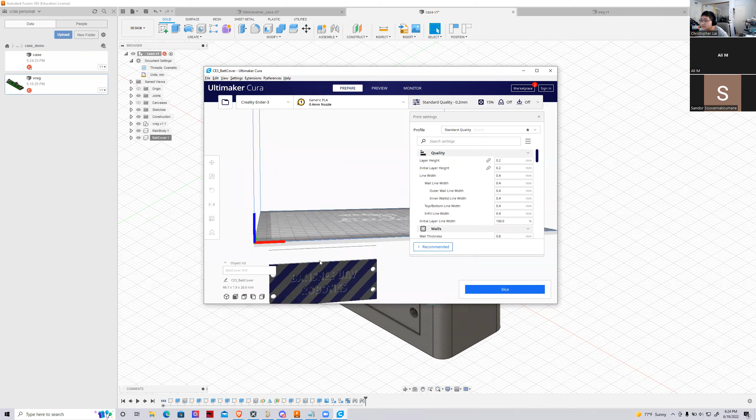All right. So this is what I see when I slice the diagram, right? Cura is kind of like the gateway between your STL file and the 3D printer's G-code files. So in this case, I have my little image over here. I don't know why there's a little bit of a shadow there. I'm going to right click this and click Arrange All Models and bring this up into view.

Okay. Then I'm going to rotate this so that it's flat on its surface. Like this. All right. So in my mind, I'm thinking, okay, this battery cover is going to print from the bottom up. I'm going to use my S1 PLA to print this. And each 3D printer has different settings. I have a lot of different settings for printers I have here.

If I go ahead and preview this, you can actually see how the printer is going to print this piece out, right? You have layers on the right. So if you scroll down the layers, you can see the printer initially prints the first layer, and then the second layer, third layer, fourth layer, fifth layer. And on the fifth layer, you can see it actually starts to print some of the support structure in orange and the actual text, the Banshee UAV Robotics. And then it keeps going, right?

So all I need to do now is rename this to UAV VREG batt cover. And then I'm going to take my SD card from my printer, shove it into my computer. And this whole stuff comes up because I have a lot of files. I'm going to save this, eject, and then I'm going to print it in my 3D printer.

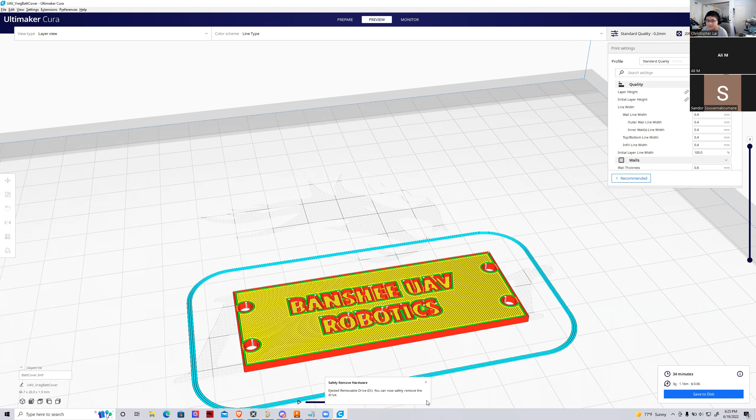But I will be posting pictures and videos of the items printing, both the battery cover and the voltage regulator, after this meeting concludes in the robotics server, just so you can keep up to date as to how this is going. I'm not going to show the entire printing process. But as of right now, are there any questions as to CADing and how this is made and how you should 3D model things?

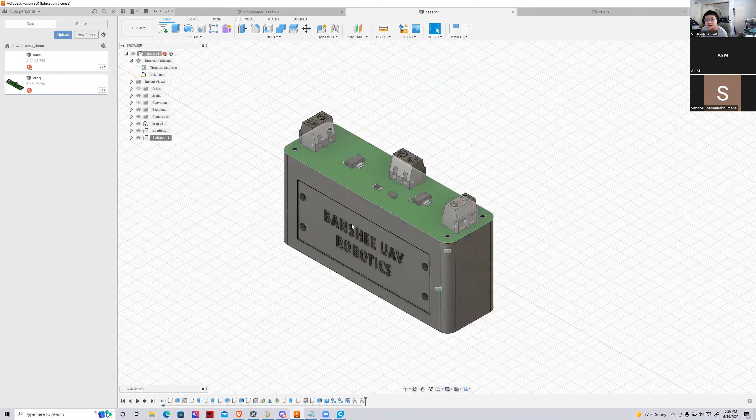All right, if not, that is going to be it for this CAD workshop, the final workshop I'm doing for the summer internship. Thank you all so much for coming and watching. And I hope you can take these skills and complete some of the required tasks on the Gantt chart yourself.